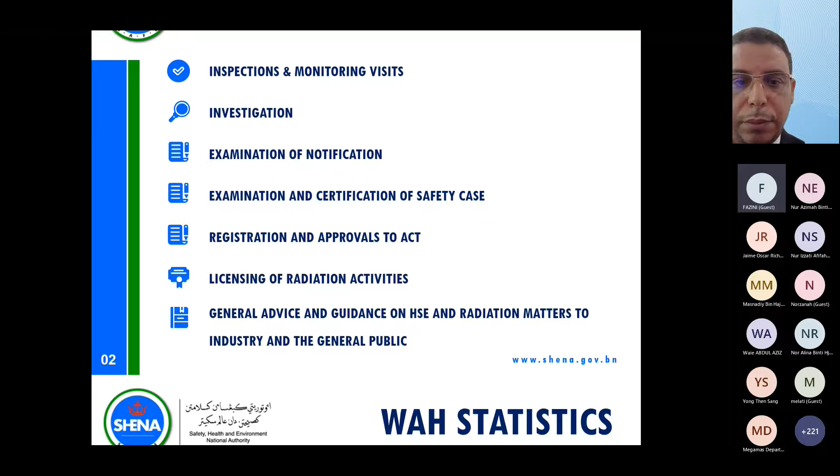Also, SHENA, I forgot to mention about SHENA registration. According to Section 32 of the Workplace Safety Health Order, registration is required for certain persons, such as anyone acting as authorized examiner for lifting, authorized examiner for vessels, workplace safety health officers, workplace safety health coordinators, workplace safety health auditors, or training providers. They need to register with SHENA, which will assess the application and, if successful, issue an approval certificate.

You can go to our website and see the different types of registration we do as part of our function, according to Section 32 and Section 33 of the Workplace Safety Health Order 2009.

This is the graph about total fatalities in Brunei. Before I talk about this graph, I'd like to give a simple definition of working at height. Working at height is any work at any place where, if precautions were not taken, a person could fall a distance liable to cause personal injury.

So you are working at height if you are working above the ground, working near the edge, or could fall through an opening or fragile surface, or if there is any hole or opening in the ground that you might fall through. This is what is meant by work at height, just to understand the concept.

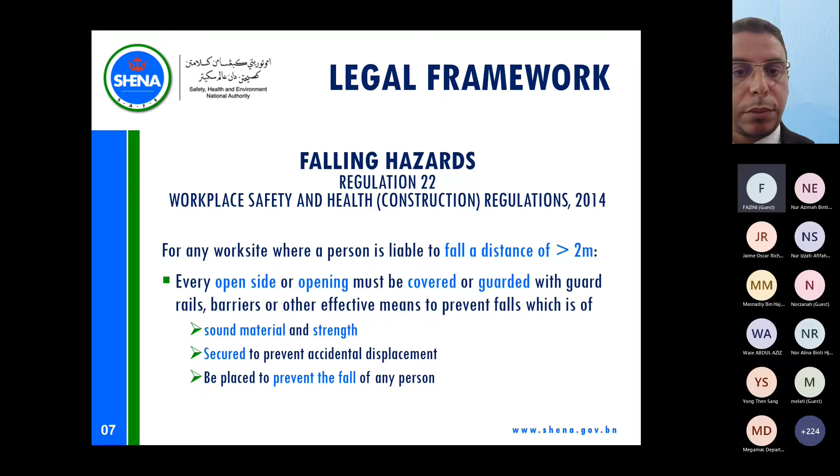In 2019 we had an accident where someone fell through the roof. The roof was covered by fragile materials, made of fiber cement sheet. When the worker stepped on this fiber cement sheet, under the weight of the person, it gave way and the person fell to his death. This happened back in

2019. So falling from the roof has to be managed. How to manage? Again, a fall arrest system with anchor points, and also you have to protect the worker from sliding, because a roof could have a slope angle. So you have to protect him by providing safe access and egress.

For example, you are using a mobile elevating working platform, or scaffolding. Once he goes on the roof, he should be provided with, for example, a walkway, sometimes a crawling board. This is good for working on the roof, especially if you have doubt this roof could be fragile, so you have to provide him with a crawling board and anchor points.

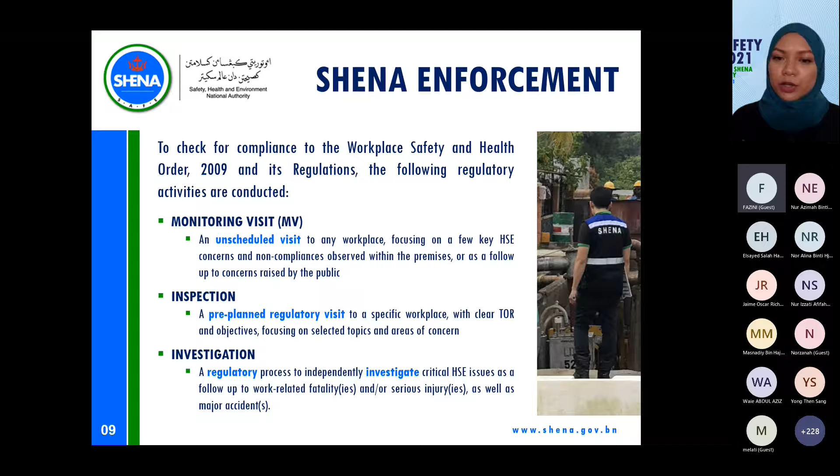So the next few slides will be a compilation of pictures and sharings that we have based on our previous inspections and monitoring visits. Next slide, please.

Okay, so here is some of the pictures that we've taken when we were on inspection. Maybe to make the session more interactive, our participants can type out what kind of unsafe observations you can see from any of these pictures. You can type it in the chat box if you want.

Yes, Norazman says no safety harness. Amirul as well, no safety harness. Aside from that, no guardrails. Yes, correct. Unprotected guardrails and open space.

Okay, yeah, completely agree. So if we look at the picture on the far left, you have the guy in a starfish position. This is still my favorite picture ever, which is actually bad, but he's working at the edge of the building, but there's no protection from him falling whatsoever. So similar to his colleagues at the top.

If you see at the top right picture, the guy is actually wearing a helmet and a safety harness, but his colleague isn't. And I think when we went here, even though he was wearing a full body safety harness, he wasn't actually attached to anything.

And though this picture is very zoomed in, but they're actually working on a residential flats. And it's not the 2-floor flats, it's I think 5 floors or 6 floors or more, and they're at the very top. At the bottom, you see a guy working on the roof with no protection whatsoever. So the chances of him sliding off the roof and falling is quite high.

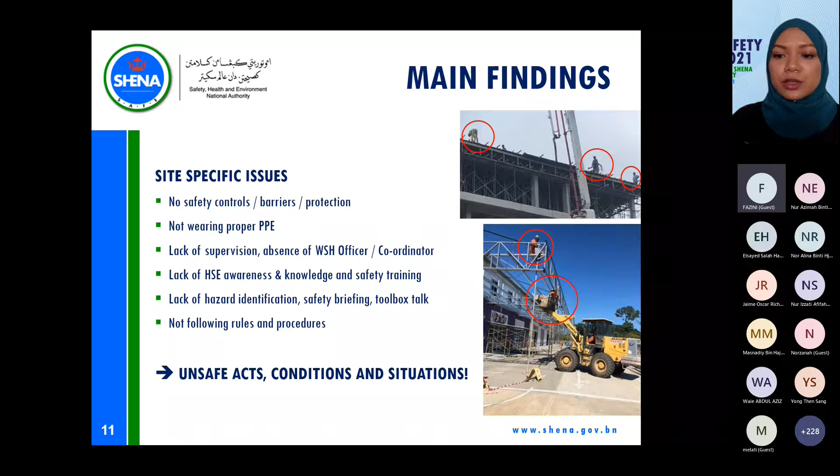So again, there's a general lack of HSE awareness and knowledge, no safety training. We've talked about that, non-compliance to PPE, we've mentioned that as well. And the last item I think is quite interesting, the absence of intervention culture.

So if we talk about intervention culture, I think it's something that's already established in maybe the oil and gas sector or the subcontractors of major oil and gas companies. But in general, the intervention culture in Brunei is still a bit weak for other general industries. I don't know whether people are just too polite or nice to each other that you don't want to intervene.

But for those who don't know what an intervention culture is, it's when you see your colleague working in an unsafe manner, or maybe he's not wearing his PPE or he's not following the right SOP, you go to the person and say, hey, you're not doing this properly. Can you do this instead? Or can you stop what you're doing and then fix the situation? But of course, you do that in a respectful and constructive manner.

For the safety system and documentation part, we often find there's a lack of safety management system, policies, and HSE plan. So in essence, there is no documented evidence of the company's commitment towards HSE, systems in place to make sure the HSE is managed and well controlled, and the workers are happy and have the awareness that they need to conduct their tasks safely.

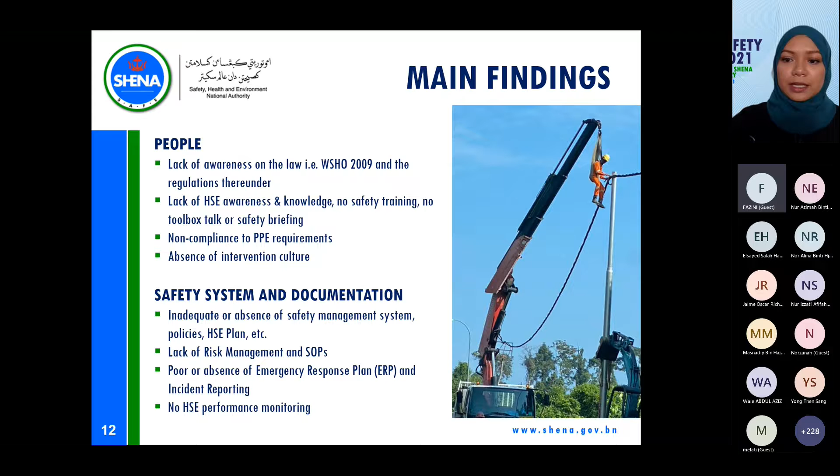So we just want to emphasize that this is something that is typically seen all over Brunei, but it is definitely unacceptable. Because the fact that you are using a single plank for a person to walk on, if he just takes one step left, one step right, one step back, he could just fall straight down. And you don't know the structural integrity of your plank. Who's to say the next day when you step on the plank, there's a crack and you might fall through. So companies or even employees, you have to know that the working platform has to be complete.

The second item, absence of proper access and egress, is also something we typically see. So workers would just typically climb on the side of the scaffold, trying to turn into Spider-Man or something, and they use the same way to get down. So you can imagine if the scaffold is not secure, that would easily cause the scaffold to collapse. Missing toe boards and guardrails.

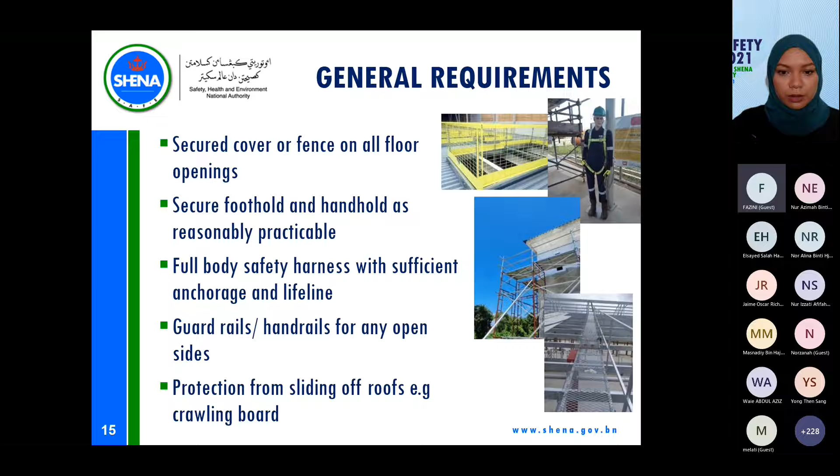Guardrails and handrails for any open sides, we've talked about this, and protection from sliding off roofs, for example a crawling board. This is an actual crawling board that was prepared in Brunei, I believe, after an investigation.

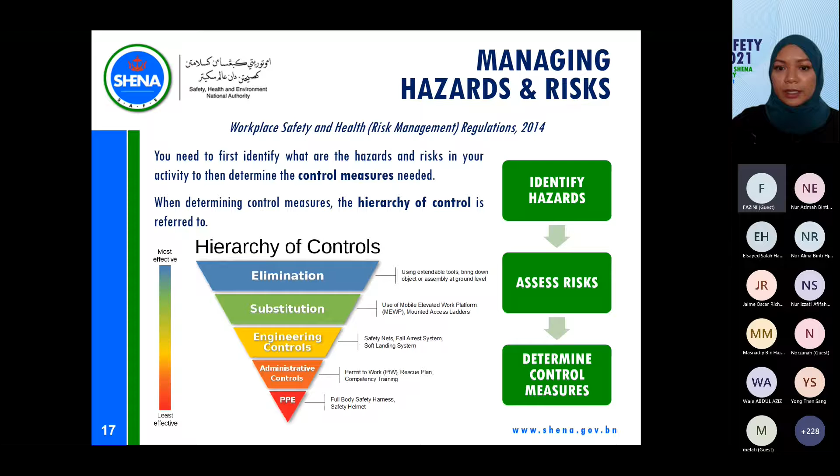So zooming in on the hierarchy of control and relating it back to working at height. The most effective method will always be to eliminate. So say the hazard is obviously falling from height, you try to get rid of the need to actually work at height. Can you use extendable tools? For example, if you're painting, can you just use a super long handle? If you can do that, then you can do the work from the ground, and bring down objects or assembly at ground level instead. I think there are some street lights where you can actually bring it down to a person's height, so you can change the bulb or do maintenance on the ground rather than sending the guy up.

You have substitution. If you cannot eliminate the situation or the work activity, then substitute it. You can use a mobile elevated work platform or mounted access ladders, which can substitute the use of a scaffold, which is less safe compared to the MEWP, or a portable ladder. You can replace it with mounted access ladders that are permanently there and secured.

If substitution is also not allowed, you can go for engineering controls. Examples of this are safety nets, fall arrest systems, and soft landing systems. Even if you have engineering controls, if you want to make it more effective, you should have administrative controls. Sometimes administrative controls are a legal requirement anyway, for example, permit to work. So you need to have that, and they work together to make sure the activity is as safe as it can be.

Good morning everyone, so sharing with you the safe practices in scaffold erection. Just to give you a brief background of our company: Mashhor Scaffolding Services was established in 1983. We provided scaffolding for Brunei Shell Petroleum Company, Brunei LNG, EAL Refinery, SCAT Terminal, and other OGPs. The majority of our local contractors dealing with the oil and gas industry also avail of our scaffolding expertise. Our scaffolding capabilities have been extended to neighboring East Malaysia. Being the single local scaffolding service provider in the country in the past, we established the Mashhor Training and Assessment Center, which was accredited by CITB and City and Guilds UK. At present, we are one of the registered training organizations in the country.

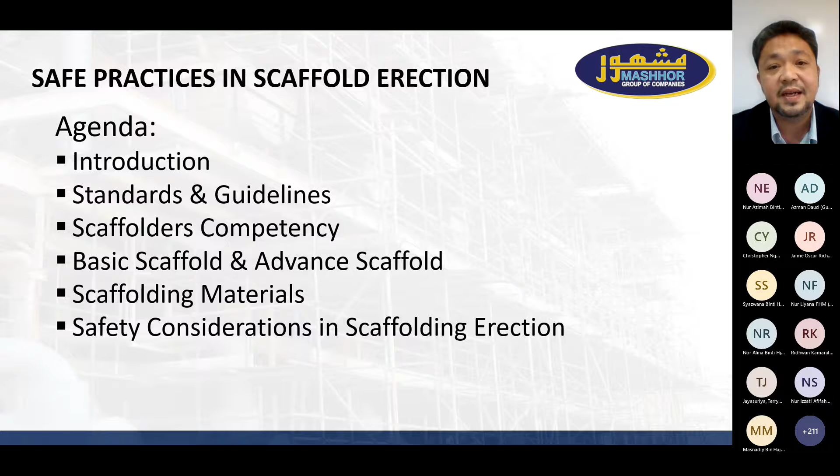So this will be our agenda for my talk. We will have a short introduction about scaffolding, the standards and guidelines we're using, scaffolders' competency, what is basic scaffold and advanced scaffold, scaffolding materials, and the safety considerations in scaffolding erection.

So what is a scaffolding? Scaffolding is generally defined as a temporary structure which provides access to a building, structure, or equipment on different levels, which persons may work from. Any structure using scaffolding components like tubes and couplers that does not follow scaffolding process should not be considered a scaffold. Scaffolding does not include structures used merely to support equipment or appliances, like rest sheds, temporary fencing, or shoring. Those are not considered scaffold.

The scaffolding must be erected safely using approved scaffolding components complying with BS 1139 and BS EN 12811. Scaffolding works such as installation, erection, modification, and dismantling can only be carried out by qualified scaffolders and supervised trainees. Scaffolding can be either conventional or system scaffold. For now, I will be talking with you about conventional scaffold.

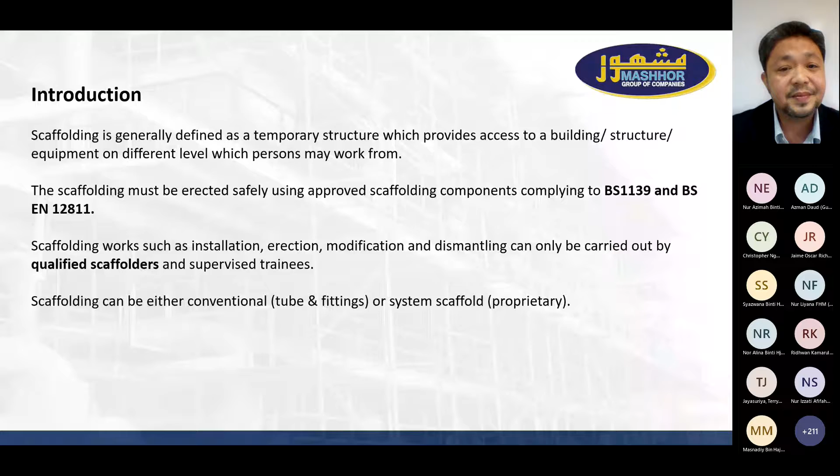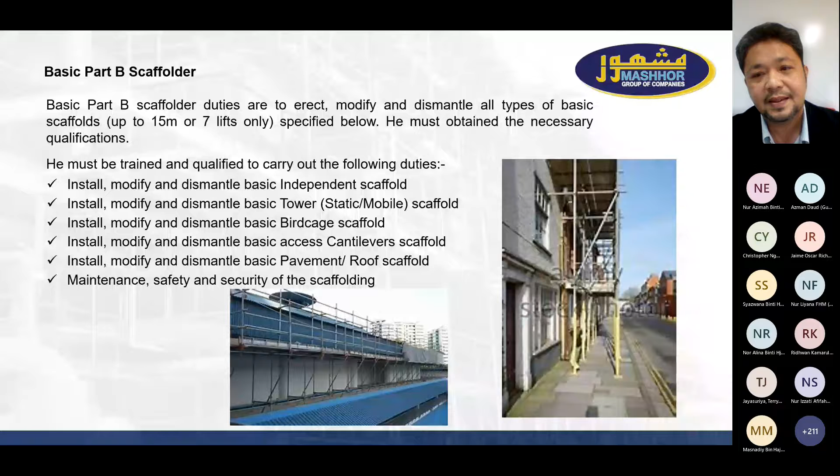So we will talk now about what is scaffold, basic scaffold, and advanced scaffold.

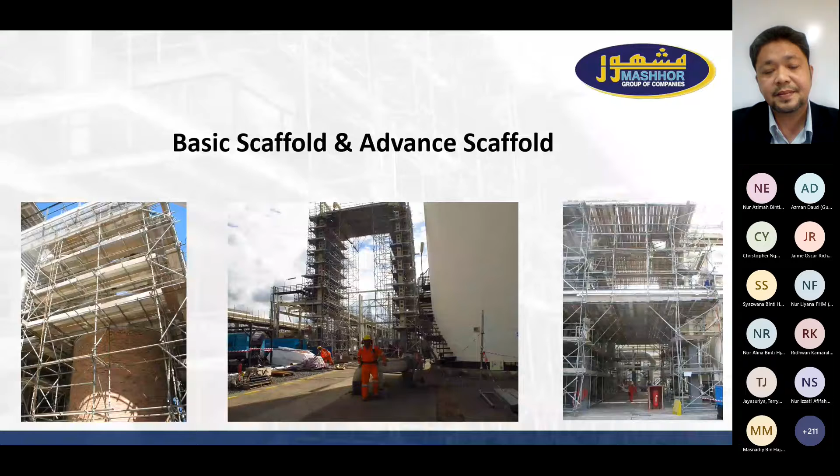Next slide, please. We have experienced bad network at the moment. Please hold, thank you.

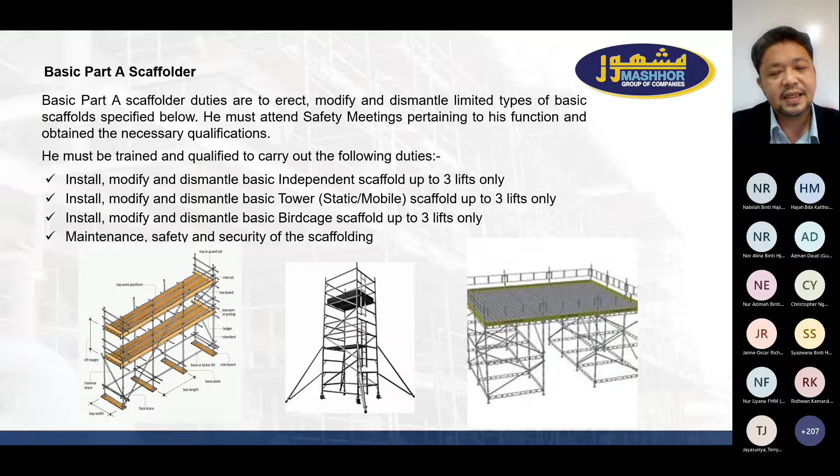Where are we again? Can you see this? Yes, we can see. Yes, there, okay.

For advanced scaffold, it is defined as any scaffold that does not fall under the basic scaffold types. In brief, a scaffold is considered advanced if it falls into any of the following: a basic scaffolding type that raises more than 15 meters or more than 7 lifts; it caters to load beyond what is specified in the standard load table shown before; or it has irregular configuration to accommodate site conditions.

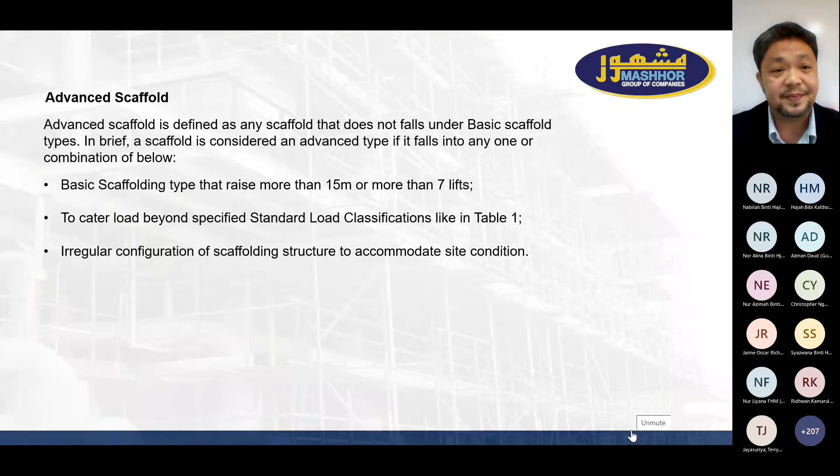For scaffolding materials, these are the standards we follow. For scaffolding fittings, BS 1139, EN 74. For scaffolding pole ladders, BS 1129. For scaffolding tubes, BS 1139, EN 39. For scaffolding boards, BS 2482 2009.

Safety consideration in scaffolding erection. We have adapted this 7-step safe work process from Assist and Assure of BSP.

Start work is not step number 1, that is step number 7. Step number 1 is planning, where we talk about work instructions, risk assessment, verify competency and fitness to work, and permit to work. Then we need to communicate. After communication, check equipment. Then we prepare the area and control energy. Then final check, where we double check and verify all controls are in place. Once verified, that's when we can start the work.

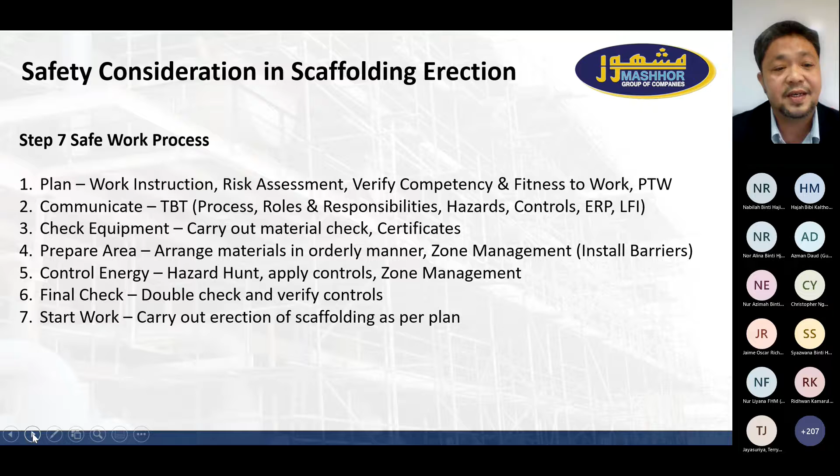For planning, we need to consider the risk assessment. The high risks for erecting scaffolding and working at height are fall from height and dropped objects. We also follow NASC safety guidelines for prevention of falls in scaffolding operations.

Full body harness and double hook lanyards should be used when erecting scaffolding. We need to make sure we are 100% tied off at all times, and we also use tethered hand tools to prevent dropped objects.

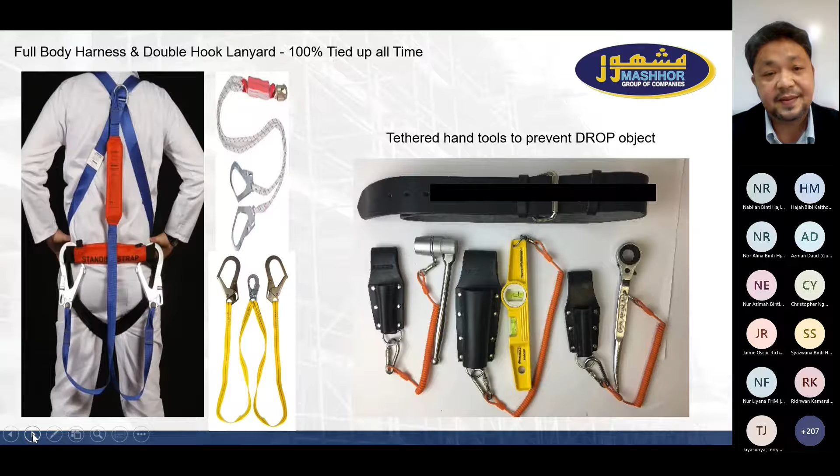Next, we need to communicate through toolbox talk, covering the process, roles and responsibilities, hazards and controls, ERP, and learnings from incidents. We always make sure the emergency response is ready before we start work.

Then check equipment: checking members for damage and corrosion, fittings for wear and looseness, boards to ensure they are clean, free from nails, not warped or badly cracked, and ladders for wear and movement or missing rungs.

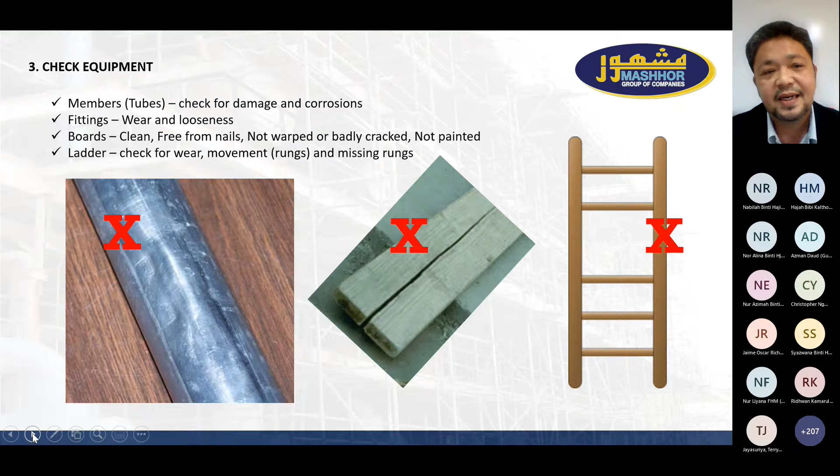Next, we prepare the area and control energy. We arrange materials orderly, apply zone management, install barriers, hazard hunt, apply controls, and ensure zone management is in place to prevent unauthorized entry.

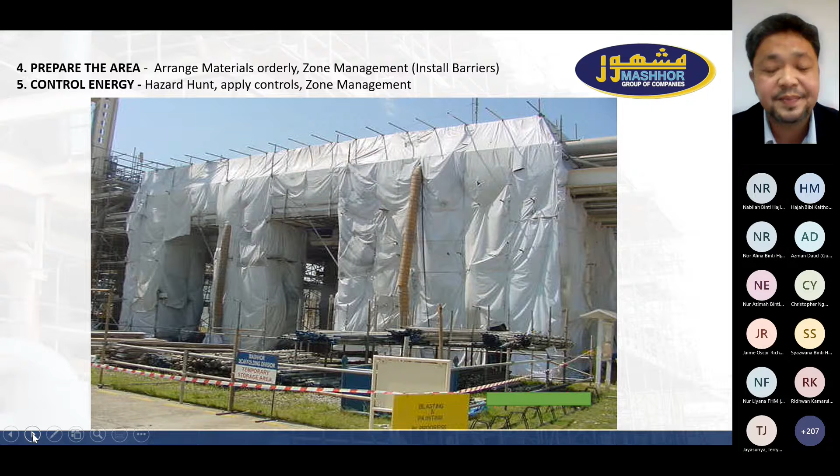After those 5 steps, we go for final check. The supervisor needs to double check and verify all controls are in place, and that's when we can start erecting the scaffolding. We erect scaffolding as per NASC TG 2013.

These are some safety considerations for scaffolding erection. Base plates are fixed to the bottom of each standard to spread the load to the ground. Sole boards are used where base plates might sink into the ground. Timber sole boards should be at least 36mm thick and 225mm wide.

For working platforms, platforms must not be overloaded and accessways must be kept clear. Boards must be lashed to the transom, because poorly lashed boards might move off the transoms, causing dangerous gaps, or tilt up when stepped on.

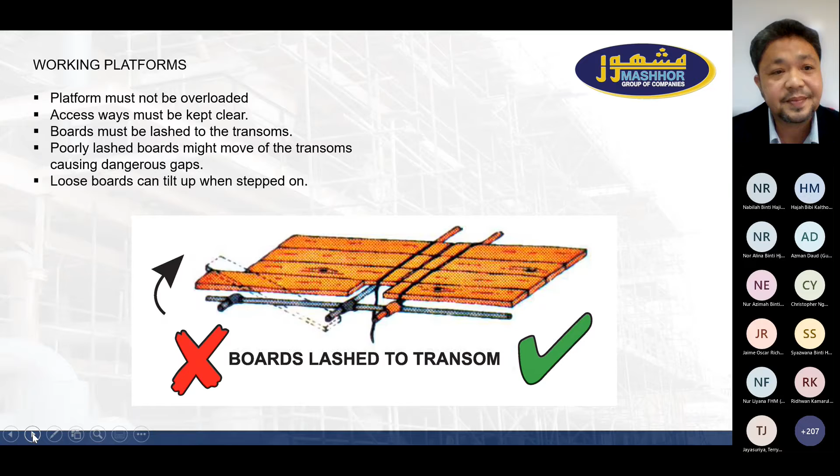We also need to consider guardrails and toe boards, which must be fitted to prevent people from falling and to prevent dropped objects. Toe boards on edge should be at least 150mm high, fitted to the inside of the standards. Guardrails should be between 0.95 and 1 meter high at the highest rail. The gap between toe board and guardrail should not exceed 0.75 meters, and guardrails on all scaffolds must have at least 2 rails.

Now showing bad practices in erecting scaffolding. In the first picture, access using bracing is a bad practice, as you may slip while doing it. We recommend using a ladder instead.

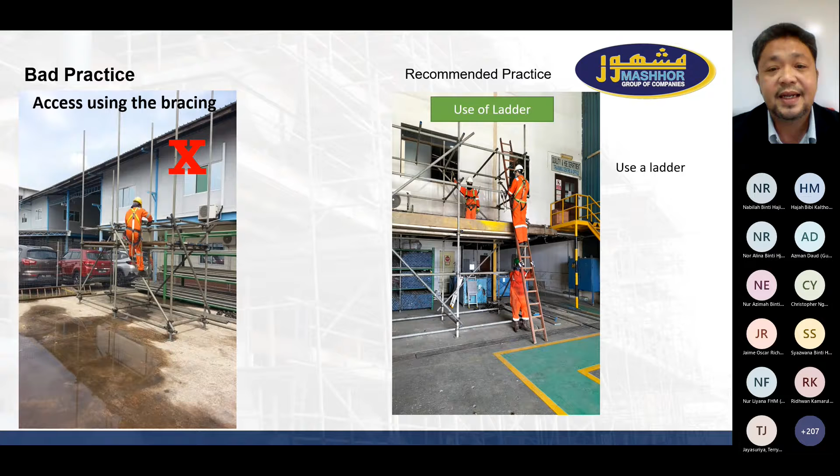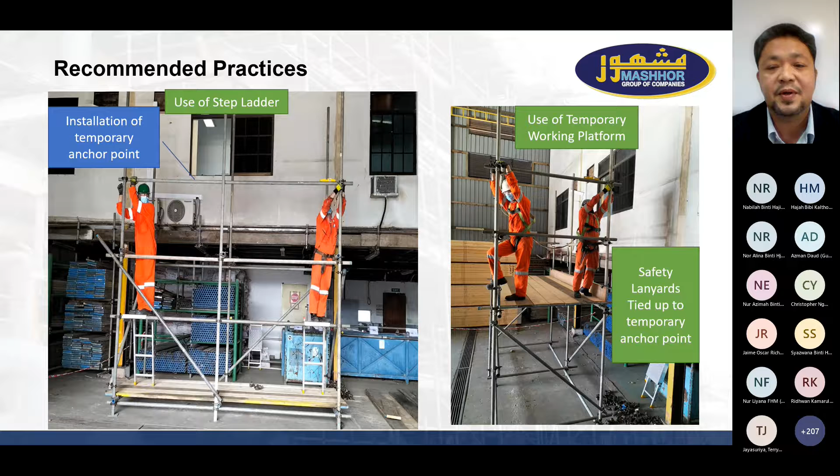These are the recommended practices: use of step ladders or temporary work platforms. As shown in the first picture, installation of temporary anchor points—at height, scaffolders install temporary anchor points so their safety lanyards can be tied off to them.

And this is the last slide for me. So, completed scaffold: after the erection is completed, it will be self-inspected by the supervisor. Then the access will be locked. The scaffold will be tagged red, meaning it is not yet ready for use. It will be handed over to the scaffolding inspector. Only after the scaffolding inspector verifies that it is safe, that's the time you can use it.

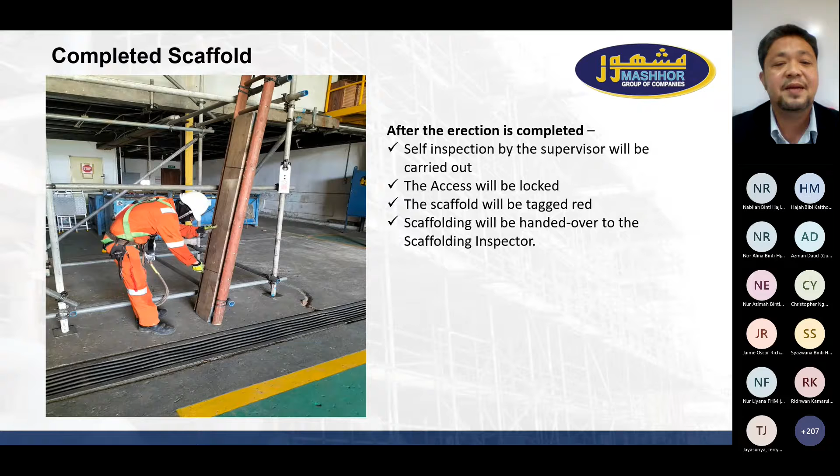So that is the end of my slide. It's been a pleasure to share with you our safety practices in scaffold erection. Thank you, everyone.

Thank you, Mr. Joseph, for the very informative sharing. By following these guidelines and practices, it can help companies improve the controls in place to ensure the safety of your workers, in order to avoid any unwanted incidents.

Distinguished guests, we now invite Masnadiy bin Haji Majid, Scaffold Training Manager and Consultant from Megamas Sdn Bhd, to share the safe practices in scaffold inspection.

Bismillahirrahmanirrahim. Chairman of the forum, committee members, fellow speakers, distinguished audience and participants, ladies and gentlemen. Assalamualaikum warahmatullahi wabarakatuh, and good morning to all. First of all, on behalf of Megamas, we would like to convey appreciation and gratitude to SHENA for giving us the opportunity this morning to participate in conjunction with SHENA's 3rd year anniversary.

Without further delay, the topic for this morning's session is safe practices of scaffold inspection. The objective is to raise awareness and knowledge on matters pertaining to scaffold inspection, responsibilities, and regulations related to it.

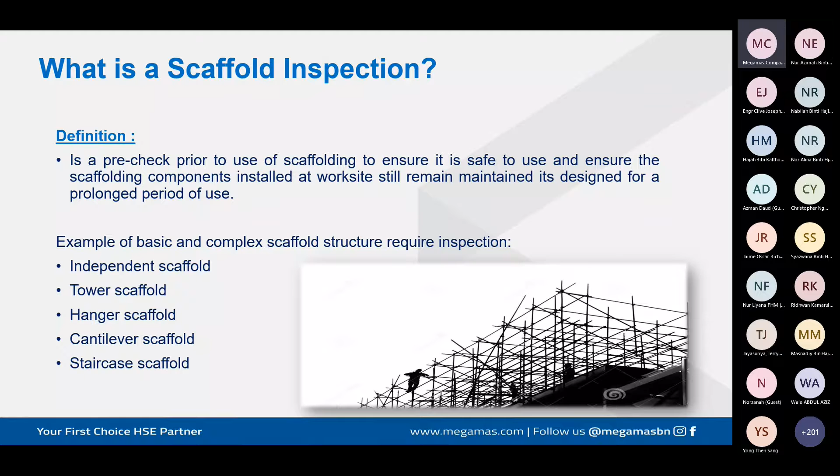Importance to the industry: safety practices apply to installers and erectors. Under the WSHO 2009, installers and erectors must ensure, as far as reasonably practicable, that the way the scaffold is installed is without risk to the safety and health of the person who uses the scaffold and others who are at or in the vicinity of the worksite, including the surrounding area and the public.

It also gives responsibilities to importers and suppliers to ensure, as far as reasonably practicable, that the scaffold materials they manufacture, import, or supply are without risk to safety and health, and meet recognized good industry standards, either international or local industry standard requirements. Next.

Under Brunei legislation — can you click? Yes.

Under the law, the Workplace Safety and Health Order 2009 provides the overarching legal requirements on workplace safety and health in Brunei Darussalam. It places duty on principals, employers, employees, and self-employed persons to provide a safe place to work and prevent harm to persons, including the public.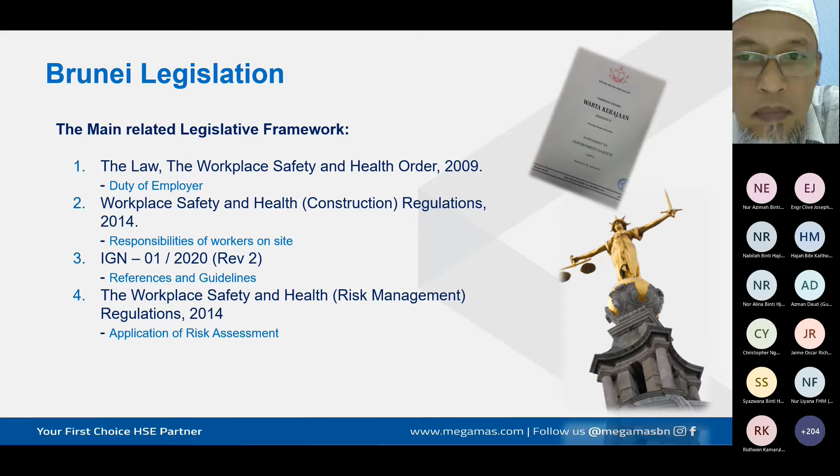Next. Under IGN 01/2020, the duty holder — that is, the management or party in control of the scaffold at the worksite — must ensure that the scaffold and/or its supporting structure are inspected by a competent person, i.e. a scaffolding inspector or plant inspector.

An incomplete or unattended scaffold shall not be authorized for access. Barriers must be in place, along with signboards, and if possible, ladders should be removed to prevent unauthorized entry. The initial inspection is required upon completion, before first use, and inspections are also required after adverse weather, after any alteration or modification, and at least once every 7 days — inspection is a must.

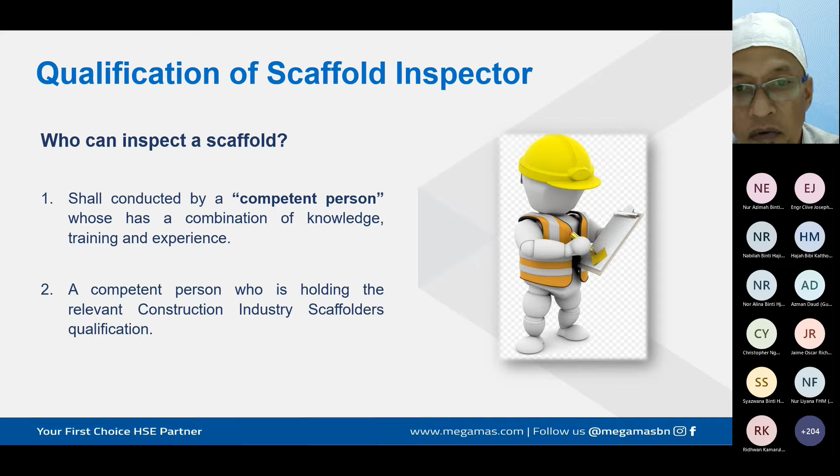Next. So the qualification requirements for scaffold inspectors: there are two types, or two stages, of inspector. One is the basic scaffold inspector and the other is the complex inspector.

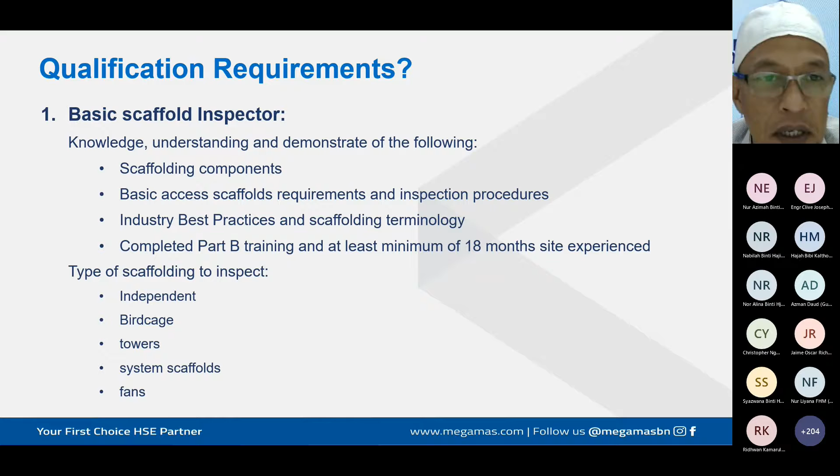The basic scaffold inspector must attain knowledge, understanding and demonstrate the following: understand scaffold components, maximum standard spacing, for example maximum lift height for every type of scaffold, basic access scaffold requirements and inspection procedures, industry best practice and scaffolding terminology, and must complete Part B training with a minimum of 18 months site experience. They can only inspect independent, birdcage, and tower scaffolds, whether system scaffold or conventional tube and fitting scaffolds and protection frames.

Next. Qualification of complex scaffold inspector: have knowledge and understanding and demonstrate the appropriate safety regulation, and the ability to interpret design, specification and statutory regulation, because for complex scaffold structures, inspection must be done according to the design.

Industry best practice and scaffold terminology, and completed advanced scaffolding training with a minimum of 36 months site experience. Interpret design drawings such as staircase scaffold, cantilever drop or truss-out scaffold, slung scaffold, shoring scaffold, and temporary building protection scaffold, which require design.

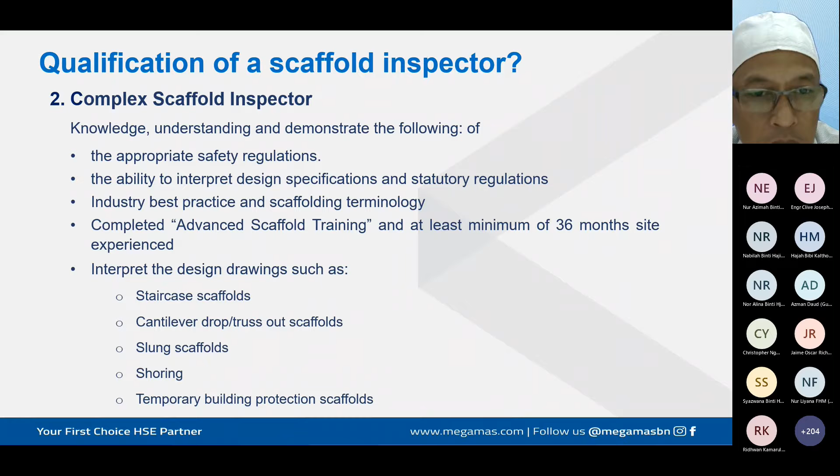Next. So what are the applications of scaffold inspection? It shall be identified and requested by a competent scaffolding supervisor, or it can be a construction supervisor. It can be performed by either an internal or third-party scaffolding inspector. A standard inspection report form will be used in printable form and secured from unauthorized interference.

The inspection report must be prepared before the end of the working period and must be shared with the client or employer within 24 hours. The report must be kept at the site where the inspection was carried out for easy access. Display a scaffolding tag after inspection as good practice, and the record of the inspection report shall be kept at least 3 months after the scaffolding has been dismantled.

Next. So what information is included in an inspection report? It should include the name and address of the person for whom the inspection was carried out, the client, the specific location of the inspection, and a specific description of the scaffold—not only the type, but the volume, how many lifts, how many bays.

The date and time of the inspection is also very important. Details of any matter identified that could give rise to a risk to the health and safety of any person. Details of any action taken as a result of any matter identified, whether major or minor—it depends on the inspector whether he has to stop work immediately, or if it's a minor finding, he can give maybe half a day or one day to rectify. Details of any further action considered necessary, and the name and position of the person making the report.

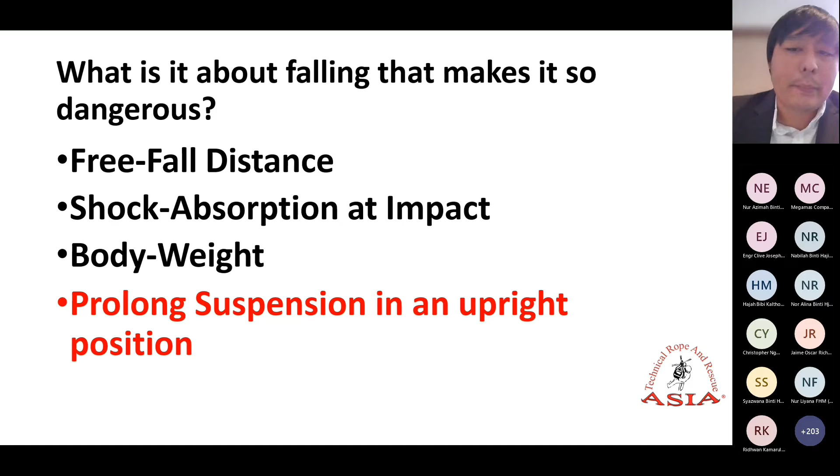Okay, there are 5 phases of falling from height. As you can see from phase 1, the person is connected to an anchorage with the necessary fall protection or fall preventive equipment.

On the first phase, the fall onset from the working platform gives way to free falling on phase 2, then the deceleration through the energy absorber elongation, and the rebound on phase 4. In phase 5, the suspension of the IP.

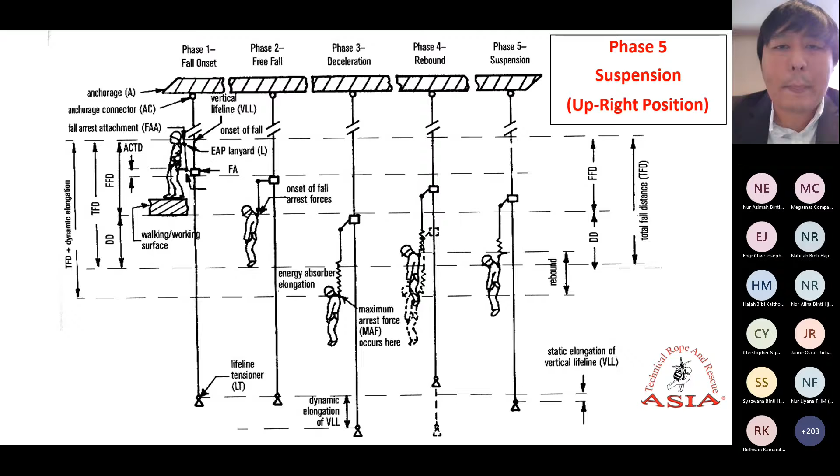Today, I will give a case study in regards to a personnel, a schoolboy, who died in Singapore this year, early February, where he was involved in high element activities.

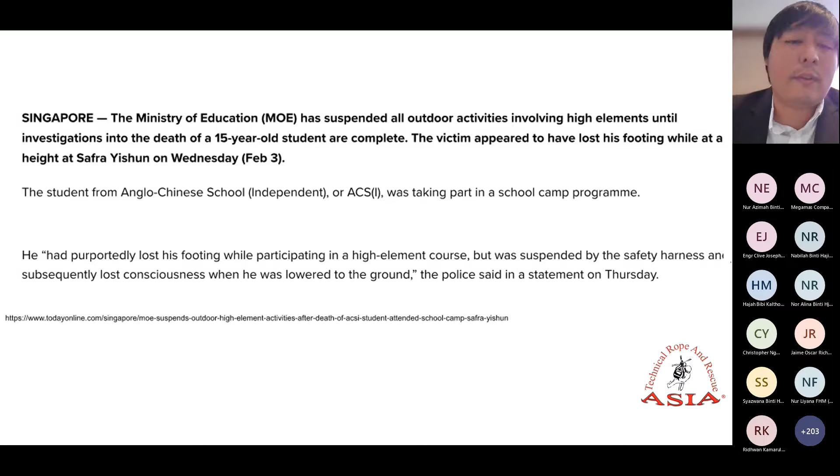In this report, he lost his footing while participating in the high element course, but was suspended by the safety harness and subsequently lost consciousness due to the lengthy time taken to rescue or lower him to the ground, and that caused his death afterward. So what could have been prevented in this case?

The authority, SHENA, has already enacted IGN 02/2020, a guideline to work at height, in the component of a prevention fall plan, section 3.13, emergency response. That will be most of our topic today.

IGN 02/2020 states that in the emergency response procedure, a written emergency response plan must be established, and it should cover the procedure for handling emergencies related to fall from height. You may also see IGN 06/2021, guidance for the work at height rescue plan, at Appendix A, checklist for work at height rescue plan.

In the event of a fall, it may be necessary to retrieve the injured worker or the IP from the site swiftly. Therefore, the equipment to perform rescue must be readily available on site, and the worker must be trained to perform rescue. It is important that the worker suspended in a full body harness be rescued promptly.

Some studies show that unconsciousness or suspension trauma can occur within 5 minutes, and that may be followed shortly after by more severe effects. Therefore, an emergency response procedure must be put in place when work has to be performed at height or where there is an exposure to height.

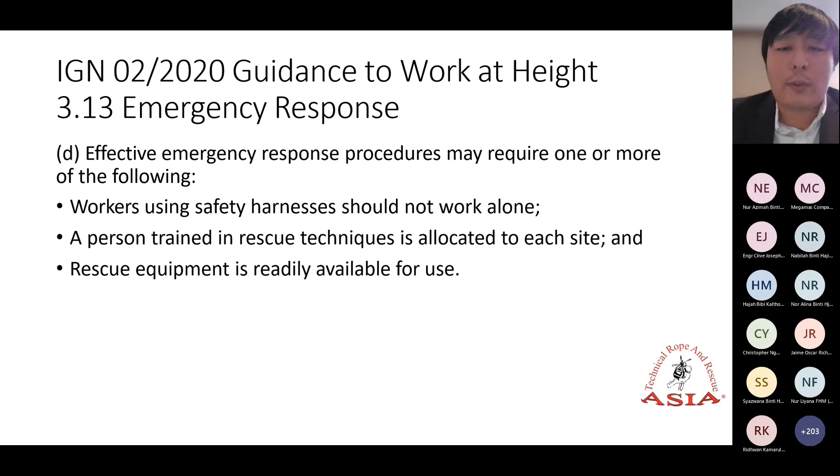An effective emergency response procedure may require one or more of the following: a worker using a safety harness should not be working alone, to ensure the checking of the safety harness and to prevent any unseen safety procedure issue that is not applied properly. A person trained in rescue technique must also be allocated on site for prompt rescue, and rescue equipment must be available on site for use.

The emergency response procedure must also cover the provision of first aid. It is important to identify on site who the first aiders are and whether they are competent, and the necessary first aid equipment must be available on site. Identify the nearest hospital or medical treatment room and establish a means of contact for emergency services promptly.

As rescue operations are often carried out under extreme stress, we must consider all aspects of the rescue process, such as the rescue method, equipment required and readiness on site, the procedure to gain access to less accessible areas, the training required for rescuers and first aiders, and efficient, readily available means of communication.

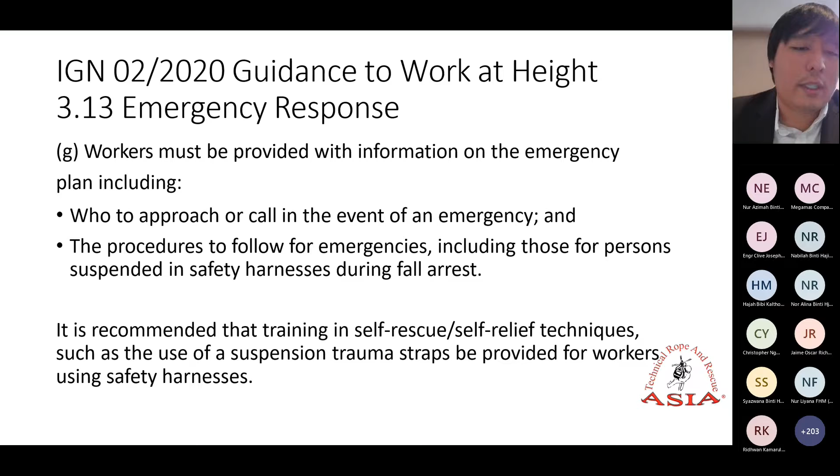Workers must also be provided with information on the rescue or emergency plan, including who to approach during an emergency, and the procedure to be followed for emergencies, including for personnel suspended in a safety harness during fall arrest. It is also recommended that all workers involved in working at height be trained in self-rescue or self-relief techniques, such as the use of a suspension trauma strap provided for workers using safety harnesses.

Okay, what is the cause after a fall? Orthostatic intolerance is the medical term for the body's inability to cope with prolonged periods of immobility in a vertical position. Hanging motionlessly is a very efficient way to induce orthostatic intolerance. In other terms, they call it suspension trauma, but trauma is not a correct term, though it's no less lethal. It is also known, in other sectors or countries, as harness hang syndrome.

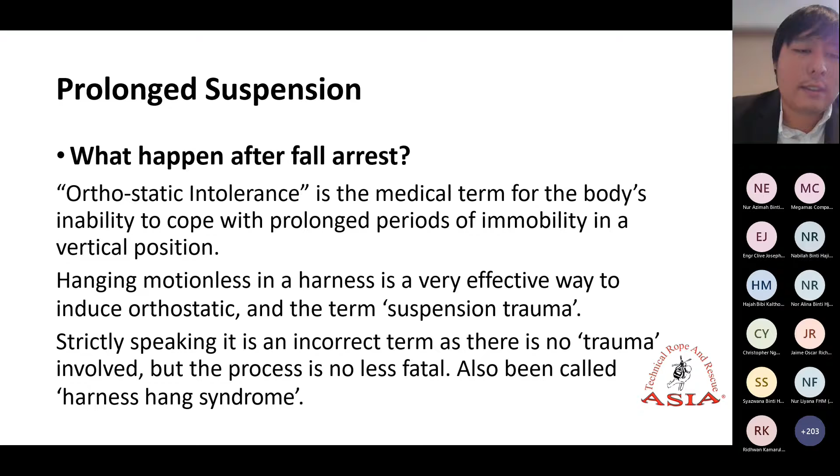Suspension trauma or orthostatic intolerance is life-threatening. Whatever harness is provided to a worker working at height, motionless suspension is not physiologically safe and will eventually lead to serious blood circulation problems that may conclude in death.

So what is suspension trauma? It is a harness-induced pathology, the medical effect of immobilization in a vertical position as a result of suspension in a harness. The official term is orthostatic intolerance, concerning the death of a relatively uninjured casualty who has been suspended in a harness. This may result in unconsciousness followed by death in less than 30 minutes.

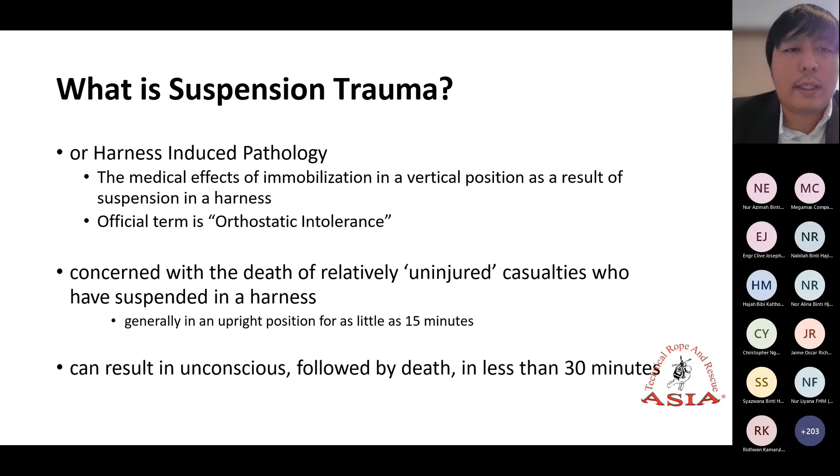Suspension trauma can result as long as the legs are immobile and lower than the heart. The reason blood fails to get to the brain is due to immobilization of the person's limbs; movement of the muscles in the arms and legs helps blood to return in the veins. Research indicates that the type and fit of the harness is essentially irrelevant to the development of suspension trauma.

So these are the rapid cascade of events during suspension trauma. In 3 to 6 minutes, venous pooling begins unless the legs are moving. In 6 to 12 minutes, obstruction of veins worsens due to the harness crimping on the femoral veins, abdominal pressure from the harness, or position pressure on the inferior vena cava. Loss of consciousness may cause the person to lose control of the airway, such as the tongue blocking the air, loss of ability to control the neck, and loss of ability to control the upper body. Last but not least, loss of further blood flow to the brain may cause death.

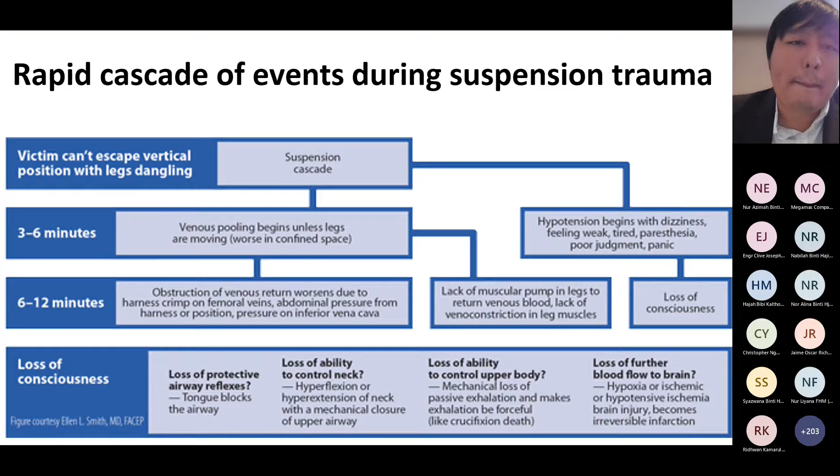Next myth: I can prevent it by keeping fit and moving my legs. This is incorrect. Fitness has no bearing, and in one study, highly trained endurance athletes actually showed more risk of early symptoms. In a full body harness with nothing to kick against, most people cannot move their legs strenuously for more than 5 minutes. It is true that leg movement will buy you time, but usually not enough.

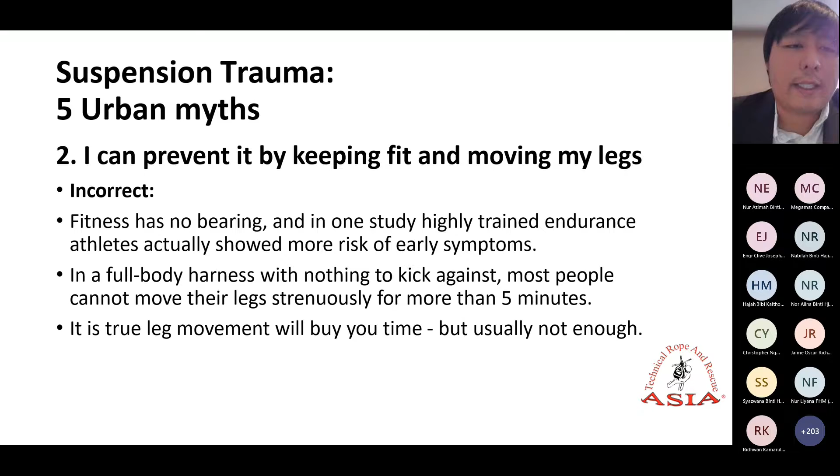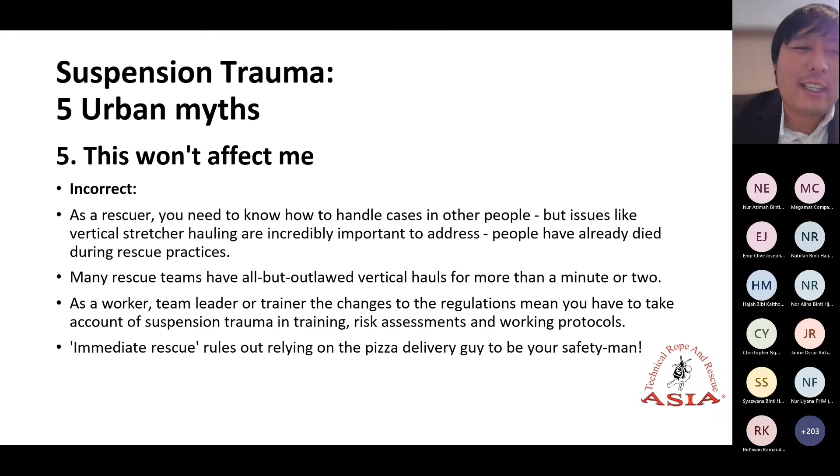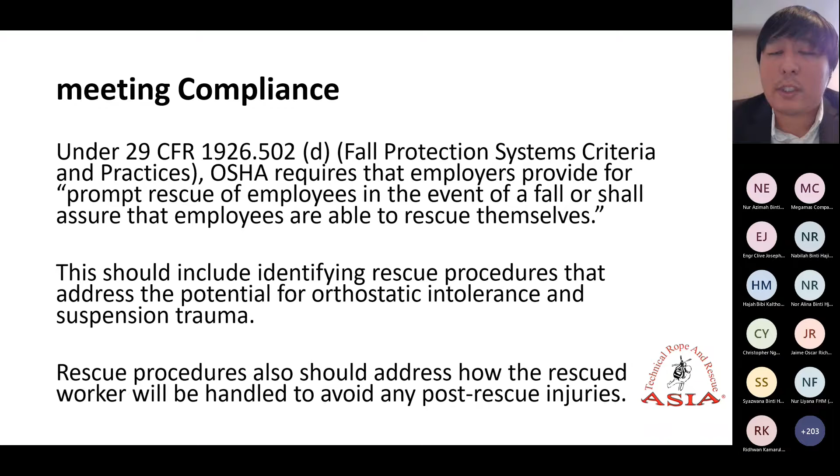Meeting compliances: for the fall protection system criteria and practices, OSHA requires that employers provide for prompt rescue of employees in the event of a fall, or shall assure that employees are able to rescue themselves. This should include identifying rescue procedures that address the potential for orthostatic intolerance and suspension trauma. Rescue procedures should also address how the rescued worker will be handled to avoid any post-rescue injury or secondary injury.

So what happens during a body malfunction after a fall arrest? The brain is deprived of oxygen, which may lead to fainting and eventually death. Heart rate and blood return to the heart, and oxygen supply to the brain and other vital organs is reduced. Meanwhile, the legs' femoral veins are compressed by the harness leg straps, and the skeletal muscle pumps in the legs are less active or completely inactive. This causes blood to pool in the victim's legs.

So how to prevent this is to use a relief step. It's a device that, when used, provides support and enhances blood circulation until rescue, permitting the ability to move and flex muscle.

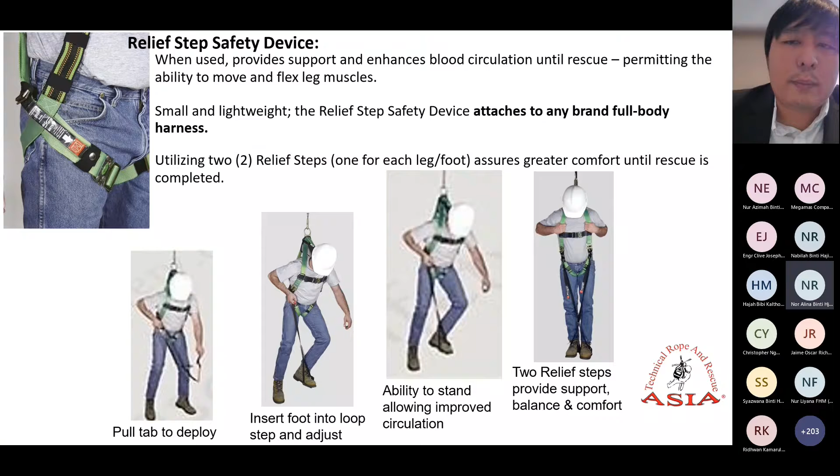This is how it looks like before attaching, and how to attach the relief step.

To overcome orthostatic intolerance when the victim is on suspension, a relief step is provided using an adjustable foot loop. If the person is on suspension, they can step on the loop to ensure the blood flow continues uninterrupted. This is also what I meant - they can step on the relief step to ensure the blood flow.

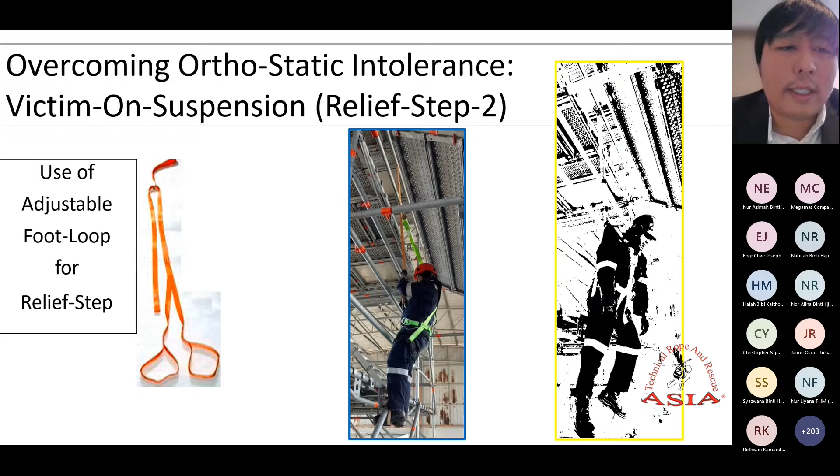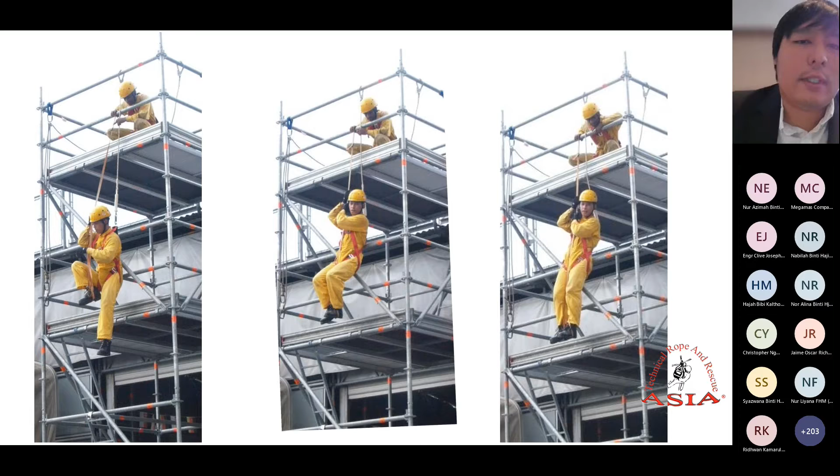Overcoming orthostatic intolerance, use of nearby structure for relief step. If any of these are not provided, they can use a nearby structure to ensure that the blood flow continues without interruption.

Non-contact rescue can also be implemented using a rescue pole. As you can see, it's a pole connected to a line where they can use this line to bring down the victim.

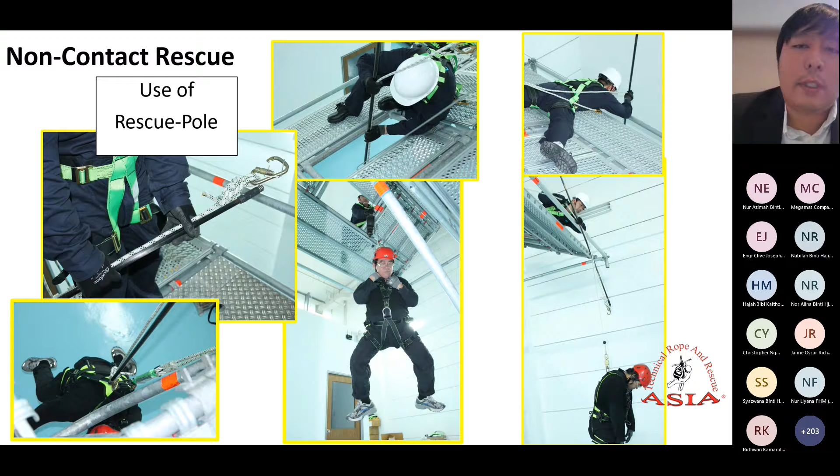Whatever methodology is used, the target time to rescue the suspended employee should be under 5 minutes.

After rescue, they should perform a recovery position, either sitting up or lying down. This is because we need to support and keep the victim in a sit-up position with the legs slightly bent, keeping the airway open. Immobile suspension for more than 10 minutes would be a dangerous occurrence and may require transfer to hospital due to the eventuality of renal function issues and others.

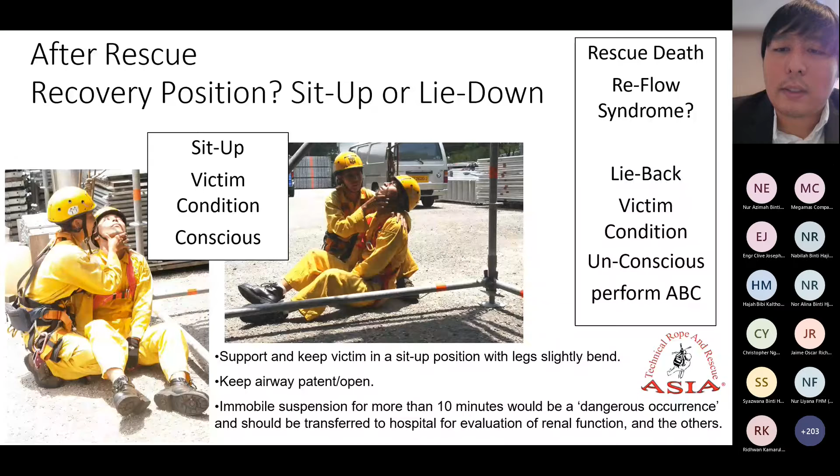Thank you, Mr. Isam, for the brief presentation on suspension trauma and its effect. The presentation highlights why it is important that every company or organization with workers involved in work at heights activities needs to have a proper emergency response plan.

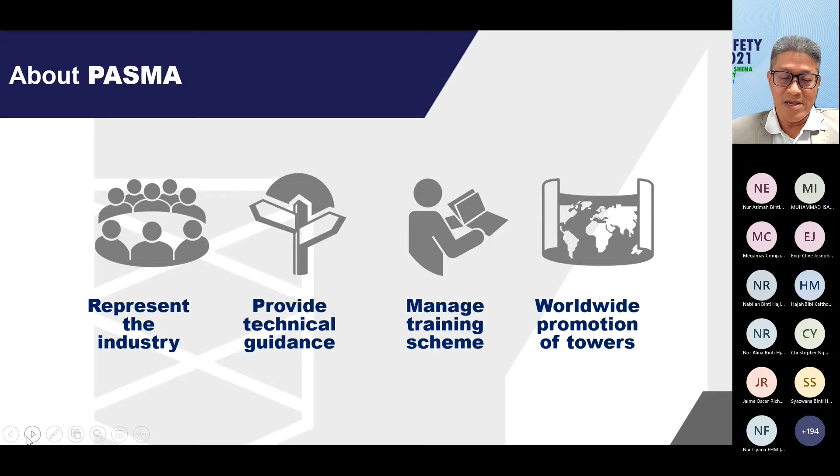We provide technical guidance to users as well as those who install it, and we manage a training scheme for those who want to be competent and be recognized as a competent person. We provide worldwide promotion of towers, and we work with organizations like SHENA to promote the safety and use of tower access.

So what is the standard that we use for towers? We are primarily talking about a tower that meets the EN 1004 standard. There's more and more across the world, including UK and Europe, to name a few - Singapore, Malaysia, as well as Oman, Qatar, South Africa, and UAE - that have started to use this standard of EN 1004.

I'm sure you will know that EN 1004 is a standard that we choose to comply with, from the manufacturer stage until it is used on the ground. So across the membership, PASMA actually certifies from manufacturer down to the user.

So it does give a very broad spectrum of complying to all the safety standards in place, the latest standard. For instance, Malaysia, when they started MS 1462.

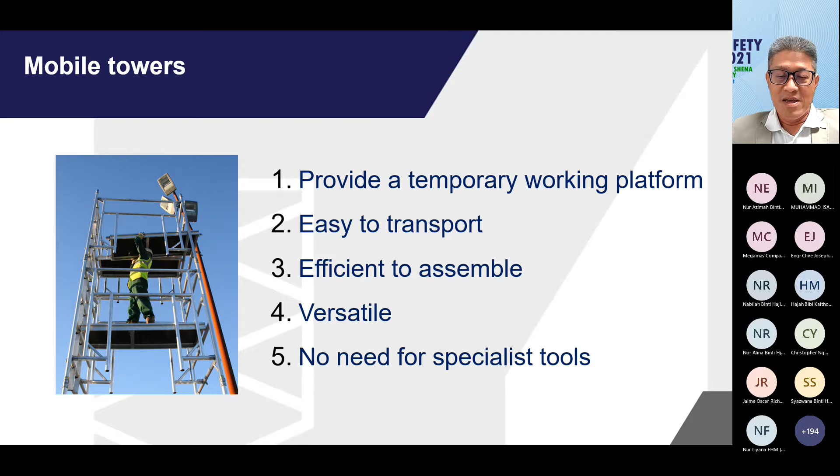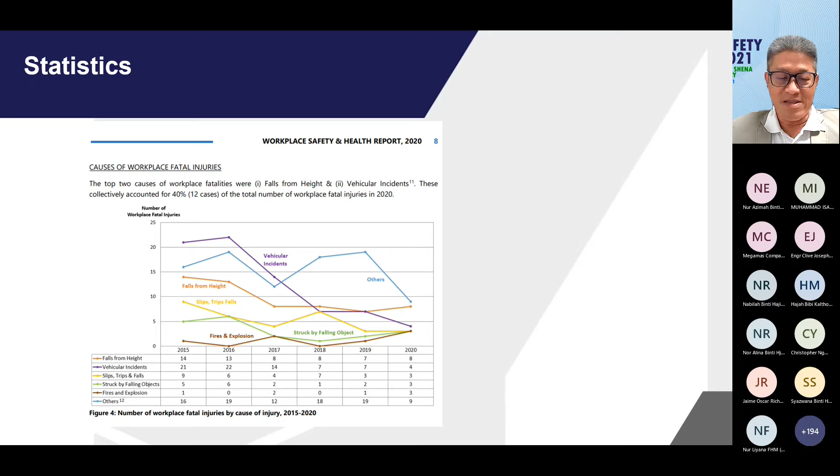I will share with you the next slide, which is a video showing how accidents happen and what we can do to prevent them. Next slide, please - next slide is a video. Can you click it? Please play the video one more time.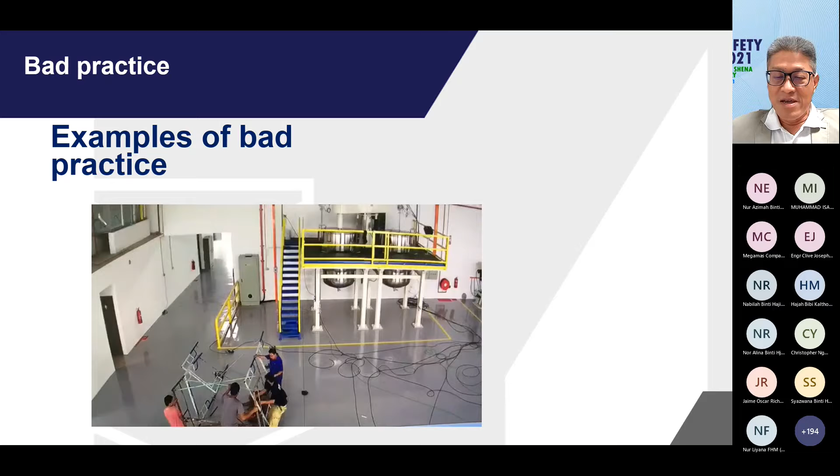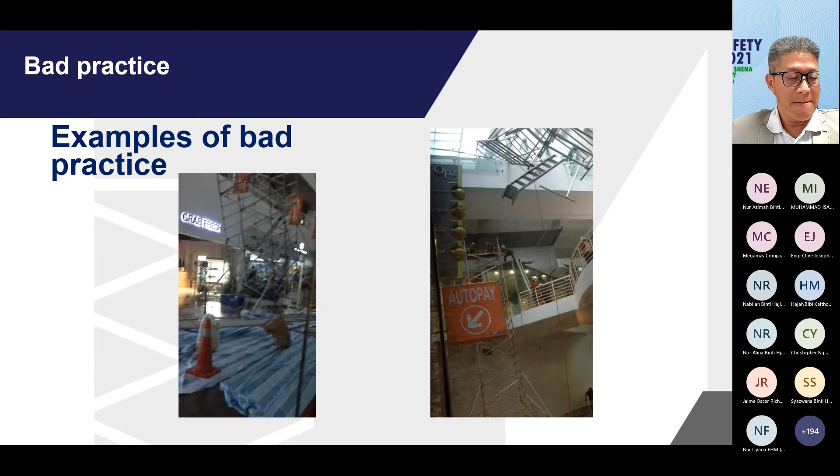This is an on-the-spot video, taken by an amateur. It wasn't actually taken for this presentation, but I've used it to illustrate what happened in a very large job that met with an accident. What are the things that could have happened?

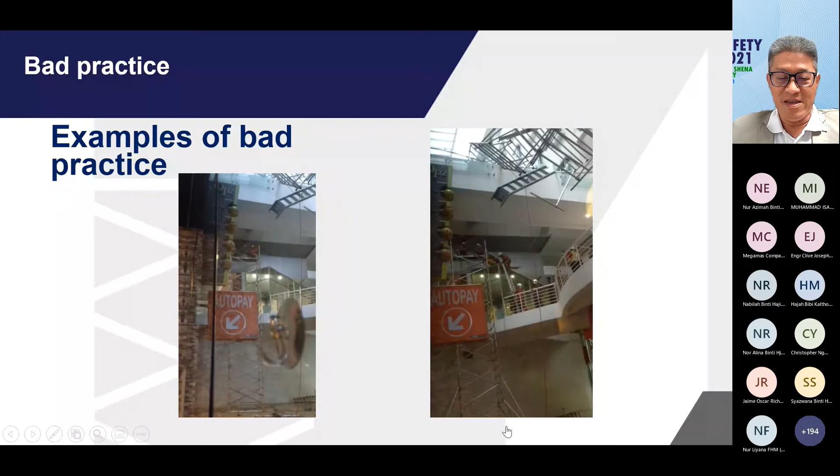You can see a rescue operation, as my earlier guest speaker mentioned about rescue. The video shows the tower being used in a rescue operation with the fire department using the mobile tower. The mobile tower happened to be nearby, and it can be built in 5 minutes or less. If you can build a height like this in 5 minutes, you can do a rescue.

At the same time, you can see the scaffold built of aluminum tower at that height in a shopping mall has collapsed, and this is a large-scale accident. This can happen for many reasons. One reason I can cite for this case is that it was built indoors, where you don't expect wind to come in. But for this building, it was open with a lot of air coming in from the side of the mall, and a gust of wind came in unplanned, causing it to collapse.

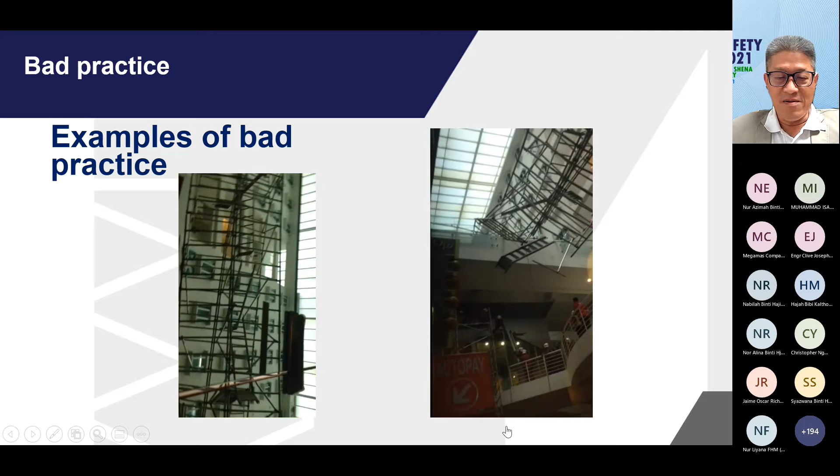Next slides, I will go through some poor practices before I go into the correct example. I have to go quickly because I have another 5 minutes.

Bad practices have spread to many areas, from airport to hospital. You can see towers being used, with people standing in a very unsafe manner, using the wrong method of installing it. Even if a worker has a harness, it won't prevent his fall because there's nothing to hook onto.

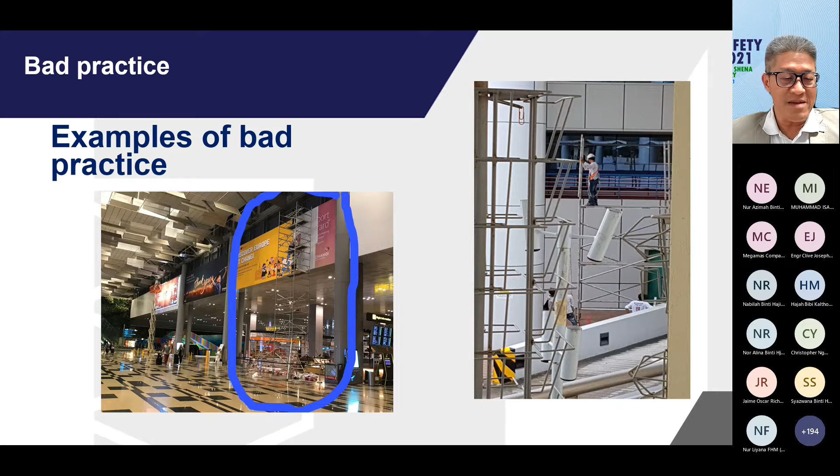The next slide shows that these buildings are not local; I've shared with you some Asian sites as well as foreign sites. Still, a lot of bad practices can be found without proper supervision. If the supervisor isn't trained, he's unlikely to spot the mistakes his workers are making.

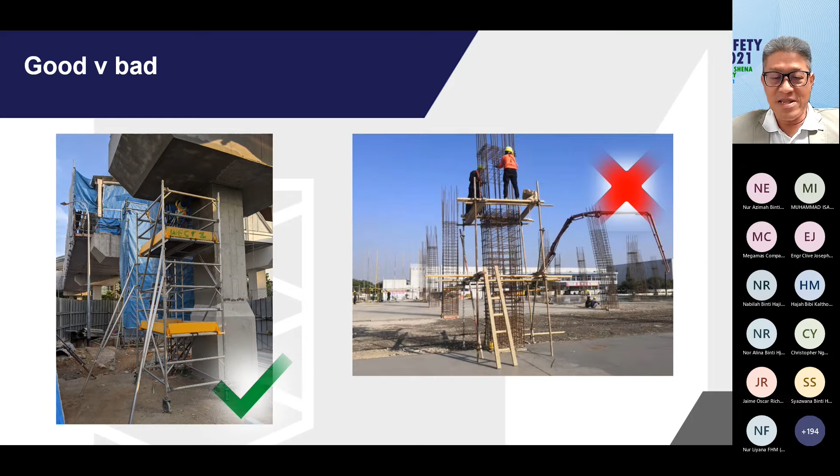I'm going to share with you how you can make the mobile tower safer.

I've shared earlier how to prevent falls without needing to wear a harness when installing this. As you can see, this slide uses animation. We provide training so people become competent. A female worker can install this safely, as shown in the next slide - she installs the handrails before getting up onto the platform. She's not allowed to stand on the platform until the handrails are installed.

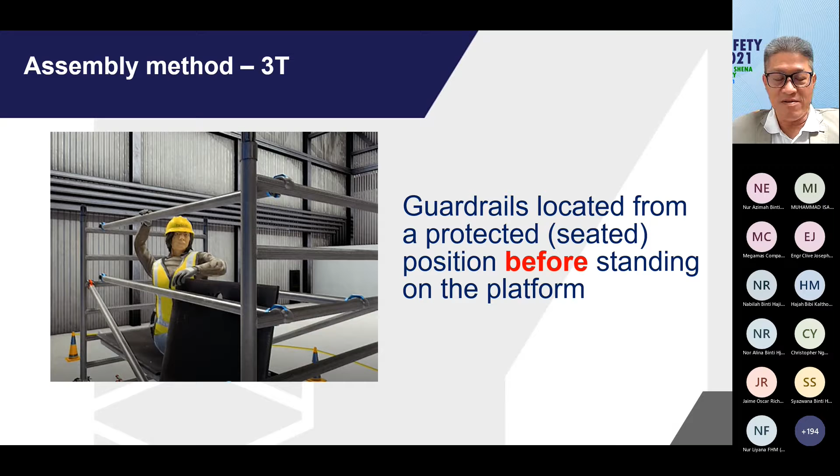This is the 3T method, the through-the-trap method. The advantage is that it's operated by one person in a protected position. It can be used easily and made slightly more versatile in certain configurations, with many tower configurations as well.

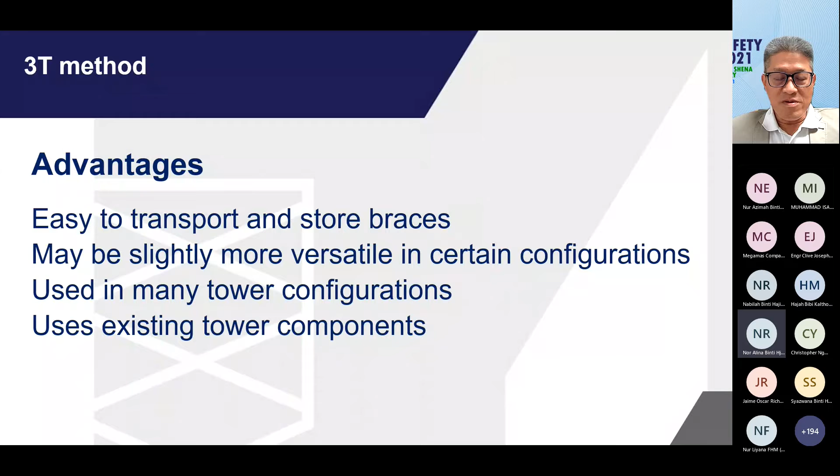The next few slides show the system with the equipment in place. If you use an advanced guardrail, a person can go to the next level, pre-assembled with the handrail system in place. This gives the user fall protection before he gets up to work at the next level.

The handrails are all in place and he's in the right position to get up to the working platform. This allows the worker to work safely at this level.

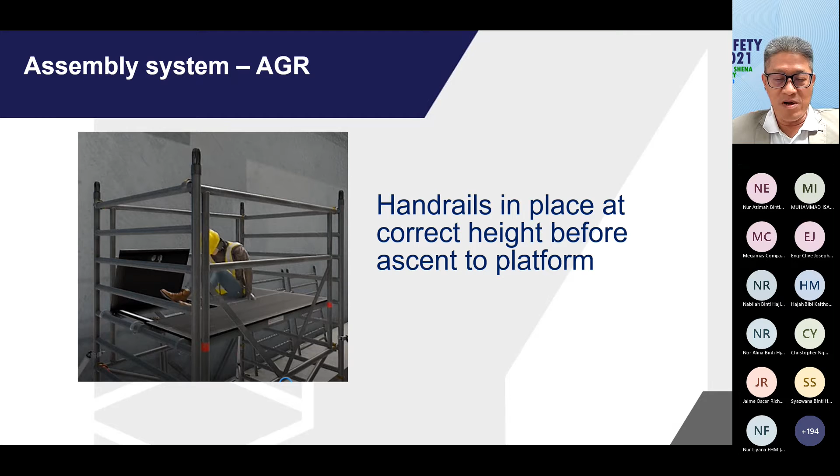What should you check before doing this job? We discussed earlier about the risk assessment - we need to consider ground conditions, the use of stabilizers, inspecting components before use, and making sure the training and competency of the worker are in place.

PASMA is able to provide a lot of information online. You can apply to add to your apps to get all this information available online, that you can get information on what is a safe guideline for towers and working in different conditions. I'm pleased to say we already have members in Brunei conducting training for towers, and the next batch will be training in the second and third week of December. This is done by our member, Best Integrated. So we will share more with you if you give me your contact, or anyone interested to know a little more about tower access. The next slide will show you the apps you can apply for to stay up to date.

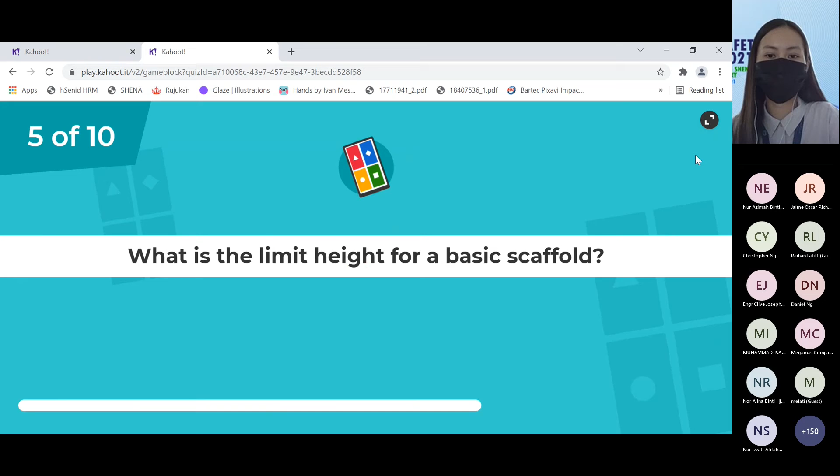What is the limit height for a basic scaffold? Answer is 15 meters. Let's see. We have Hilmi leading.